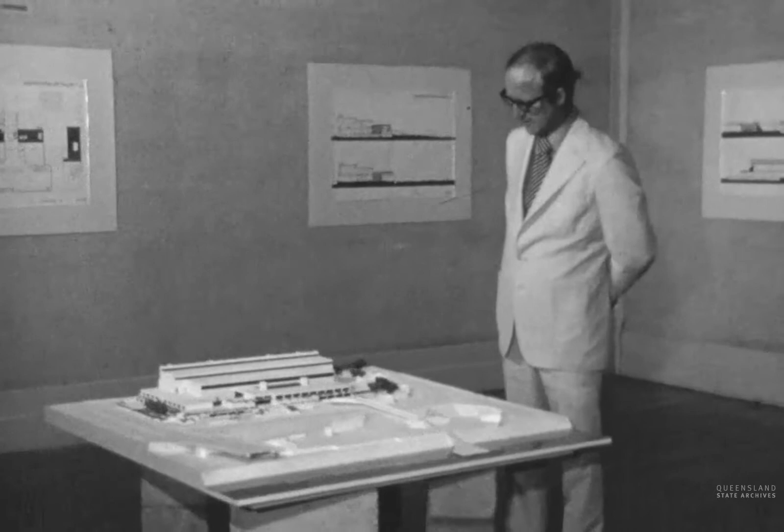The concept of the Queensland Art Gallery has been to create a gallery which is visually linked between the city and its people. This has been achieved by creating a series of landscape platforms which will be heavily landscaped with foliage and which will link down in steps towards the river.

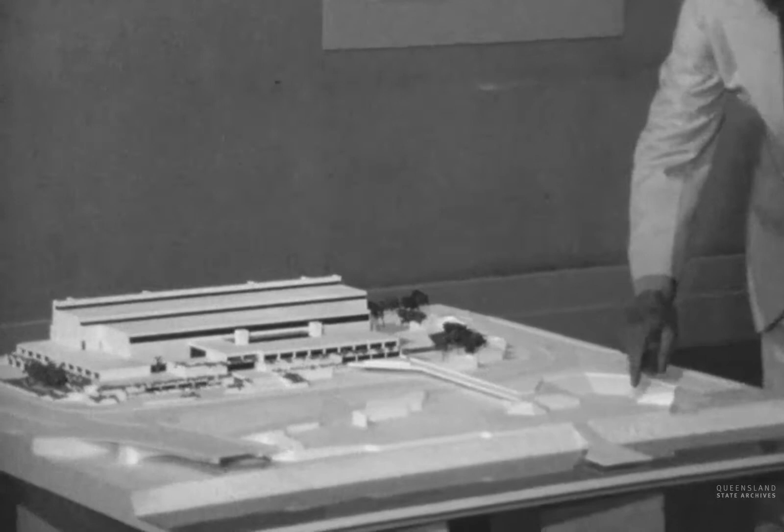As the site is isolated from the river itself, leaving a considerable area free on the riverbank, there has been a serious attempt to link this area with the main area where the gallery is located. This has created a landing platform from which people can arrive by boat and walk across a roadway on a landscape plaza which will link the restaurant areas of the art gallery and afford people using the restaurant areas to look back towards the city.

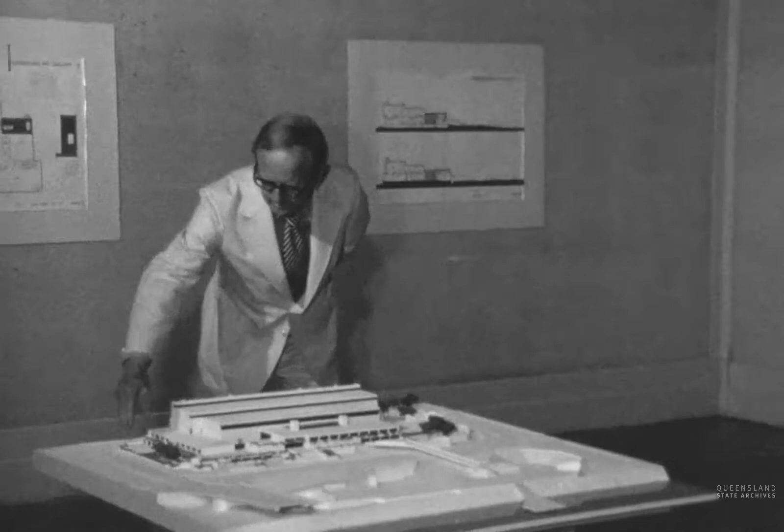The principle behind the landscape terraces has been to afford use of the top of the gallery during times when the gallery is closed. This will allow people to move from Melbourne Street onto the top of the gallery itself and move along into the main entrance, which is on the first floor level.

As the gallery steps up towards Grey Street, the major gallery spaces create a higher platform at the back which acts as a screen to the rather hostile urban fabric behind the gallery site. This will shield the viewer on the city side of the river from views of the elevated railway line, which will be developed in the near future, so that the gallery from the city will be seen as a series of landscape terraces with a screened wall, with the distant Taylor Range and Mount Coot-tha as a backdrop.

The major orientation element in the gallery itself has been a mall of water which flows from north to south and flows completely through the gallery, separating the public areas from the administrative and gallery areas.

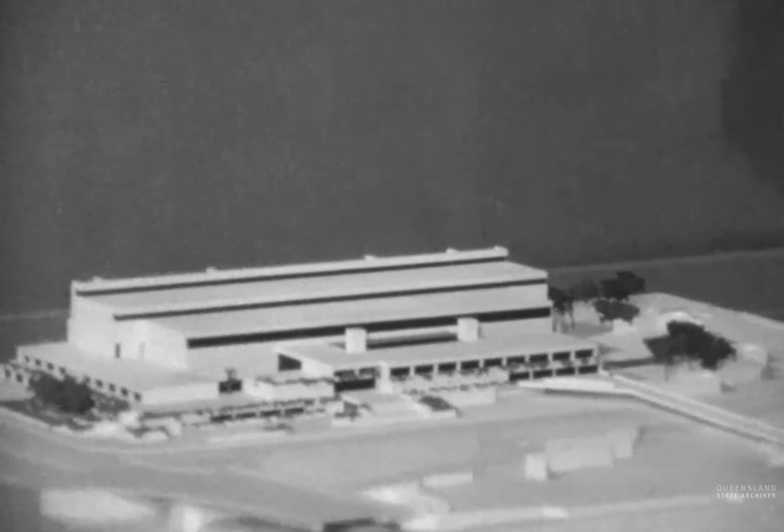The major orientation element, both externally and internally in the gallery, is a mall of water which flows from north to south throughout the gallery, and this separates the public facilities and the gallery spaces.

Bridging the mall is the main lobby or orientation space, in which people are moved from the entrance level by escalators to either the gallery floor or the temporary gallery floor. This temporary gallery, located adjacent to the mall, will have related fountains, bubbling and effervescent with the changing types of exhibitions afforded to a gallery of this quality.

To the north, the sculpture gallery opens to a garden area and also to the mall, and sculpture will be able to be seen in varying forms of light and also in varying dimensions by virtue of a ramp, for which one will be able to walk from the main gallery space down to the lower sculpture floor, so that a piece of sculpture can be seen both from above and below, depending on the position of the viewer.

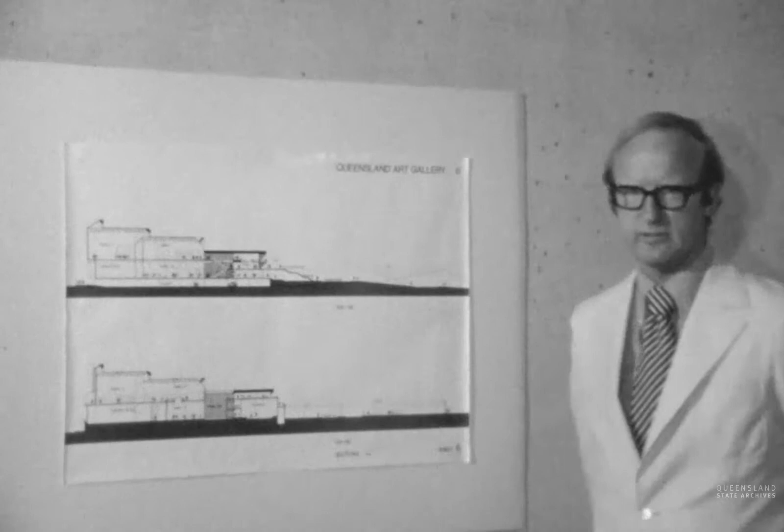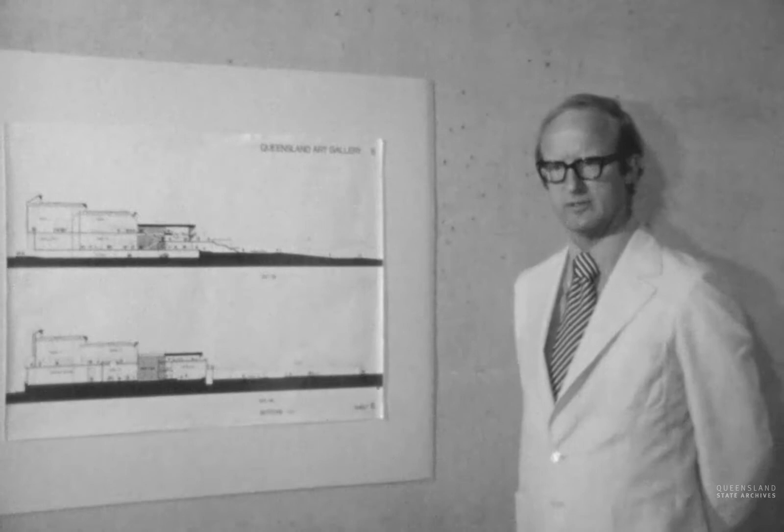The lowest level of the gallery contains a car park, and from this car park the gallery viewer will be able to move via a lift which will penetrate the foyer areas. It is envisaged that this lift have a glass enclosure so that people will feel, as they're being moved through the foyer, with the multi-use of movement patterns occurring on the escalators and people on stairs, the whole foyer area itself will develop into an art form in its own right.

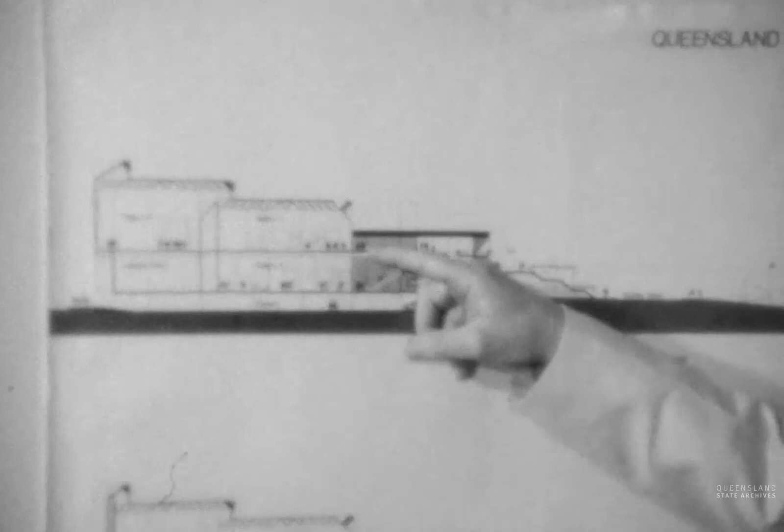From this foyer, people will be able to look along the mall, both north and south, and to be able to readily comprehend their itinerary.

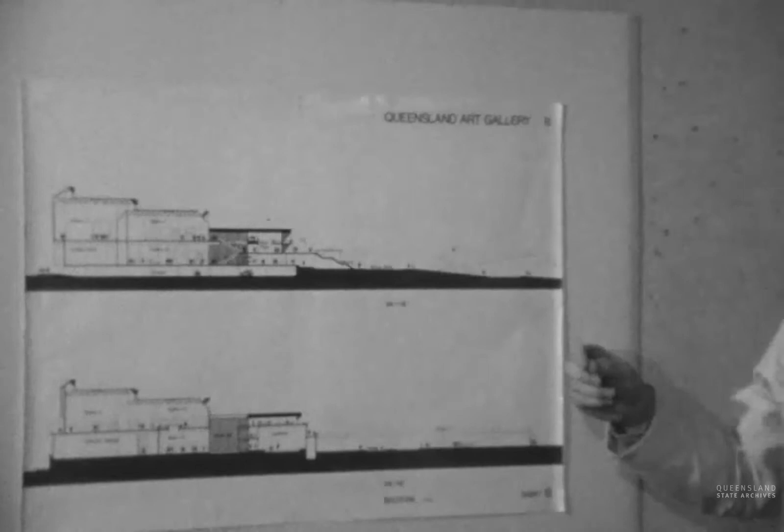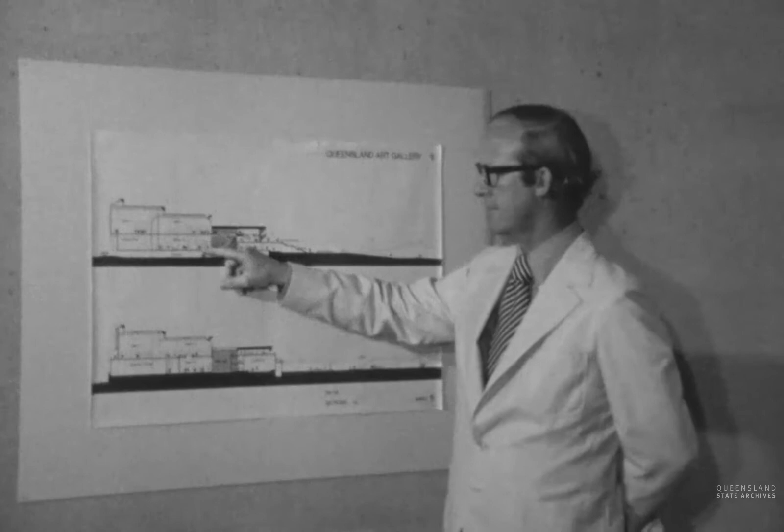They will be able to move onto the main gallery floor, which on the northern end will allow them, after they have made their decision, whichever way they wish to move, to move down a ramp on the northern end through the sculpture gallery and come back into the temporary gallery. From the temporary gallery, they can then move back into the foyer and either up the escalators or through on a lower level out onto Stanley Street.

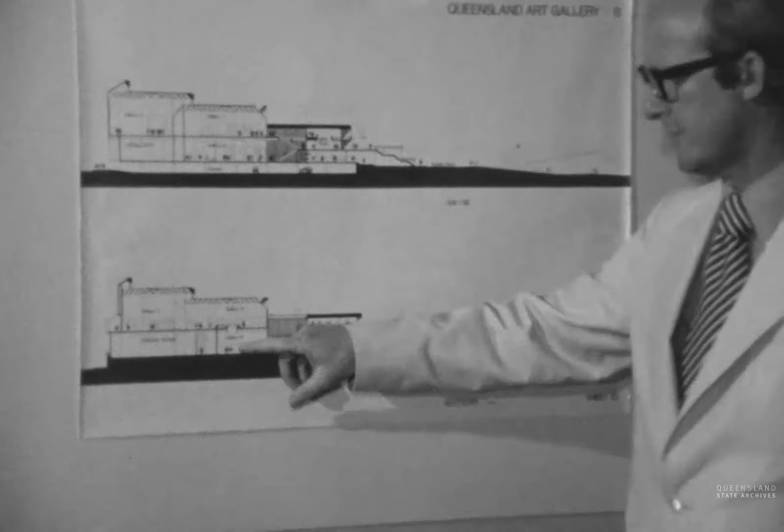One of the virtues of the location of the gallery spaces has been that there have been openings left which allow a person in one gallery to look through into another gallery, so that they may see something which may interest them and be able to move in whichever itinerary they please.

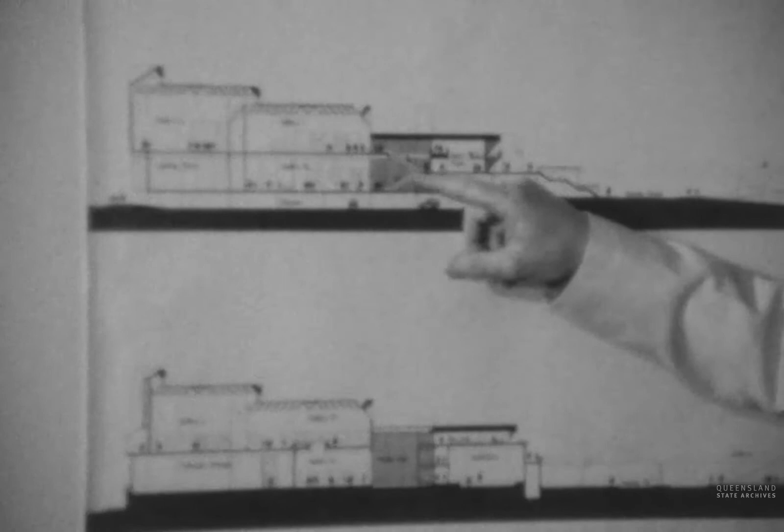There have been several attempts made to make the itinerary as easy as possible, so that if a person came in and only wished to go for a short space of time into the gallery, they can do so by moving into the temporary gallery, through part of the sculpture gallery and back across the mall on a short itinerary.

Should they wish to pursue all of the gallery, they then move via escalators up into the major gallery spaces.

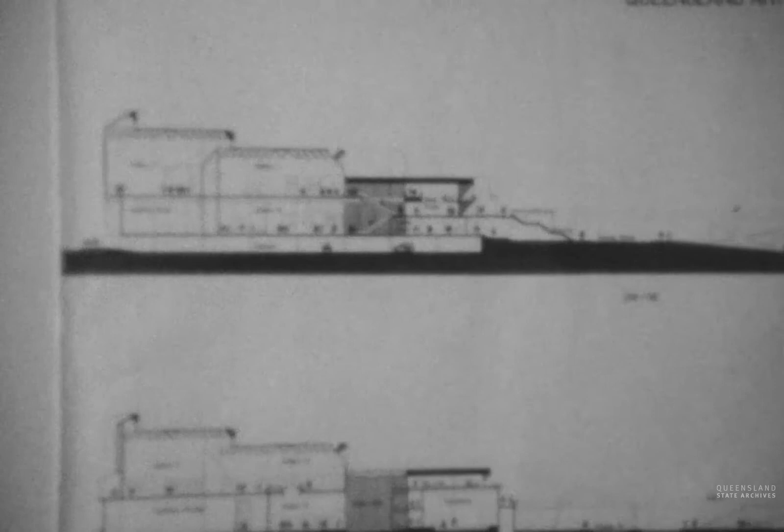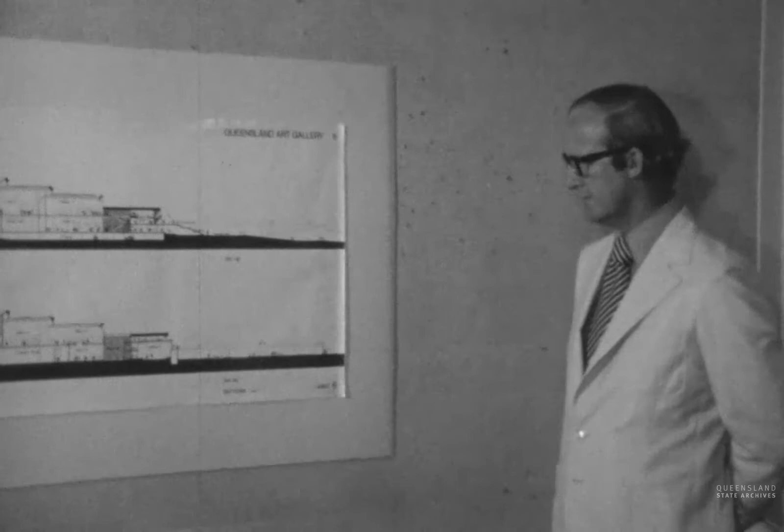On the river side of the mall, there is an auditorium, and this is completely self-contained with its own facilities, and this could be used separately if so desired by using the lower foyer entrance, which is separate from the main foyer entrance on the first floor.

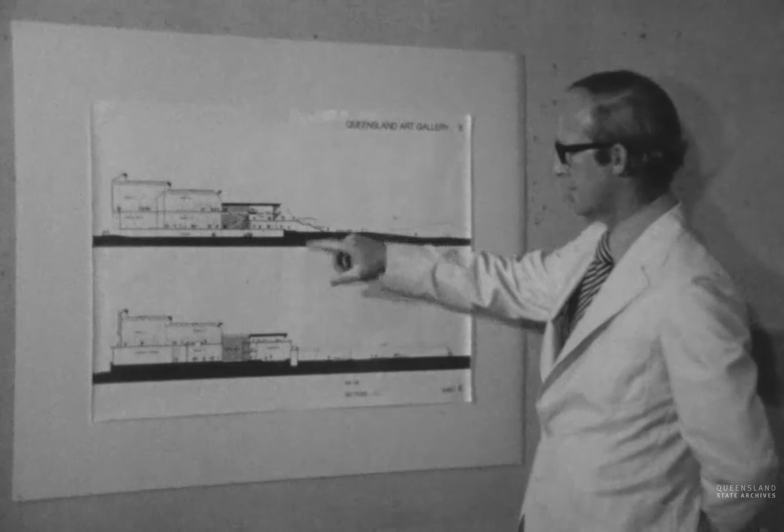From the main gallery spaces, there are also lounge areas located in several places which allow a person to go out and be used as a smoking lounge. In these lounges there are completely glass walls and glass roofs, so that a person standing at the back of the building can look completely up and down Grey Street, and similarly be involved with the large walls which will rise above and along the end of the gallery.